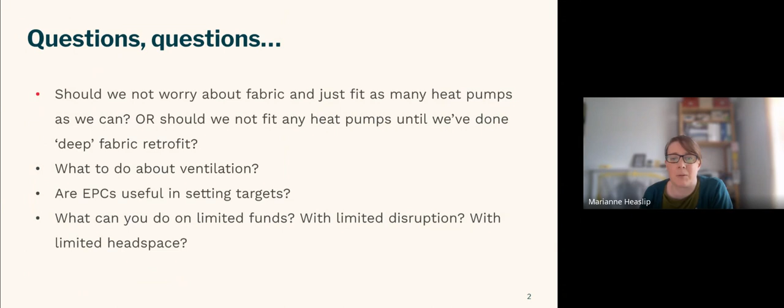I would always argue that the best thing to do is acknowledge that this is complicated, and understand that all of these questions can only really be answered with another set of questions - about understanding your aims and your priorities. Ultimately, it all comes down to what is it that you're actually trying to achieve. By understanding that as well as you can, you're able to answer some of those other questions, and understand where your efforts should go, what you should be prioritizing, what you should emphasize.

A really key thing is to understand what your retrofit priorities are. Is it purely about carbon emissions reductions? Is that all you're concerned about? Is it about fuel poverty and fuel bill reductions - a different angle on things you are most focused on? Or is it about the comfort and health of the occupants and also possibly of the buildings? There are lots of other things listed there, lots of things to take into account.

What you need to understand is that things like decarbonisation have technologies, approaches and methodologies that go best with them, versus things like comfort, health and fuel poverty, which may have some overlapping approaches that work well and things that align, but they're not actually the same thing.

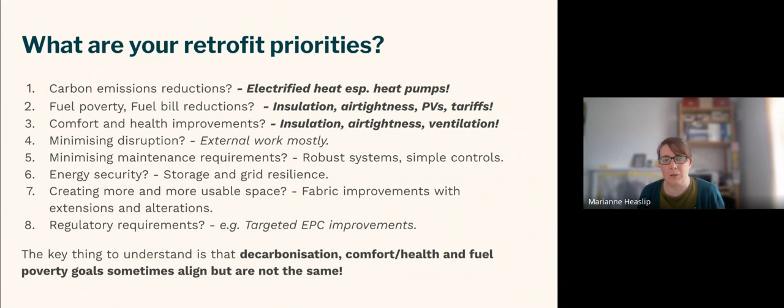...requires a different approach, and understanding what your focus is and which of those you're most driven to achieve - sometimes that's about the needs of the people in the house. No doubt, that's what it should always be about, really. But no doubt it will also be about how much money you have, what the requirements of funders are - all of these other things go into it. Being clear about your aims at the outset will really help you make decisions further down the project.

Ultimately, it's the retrofit project brief that's the really key document. It's going to help you understand what you're focusing on, what you can safely exclude, what things might be distractions. That brief is all about establishing intended outcomes as set out in PAS 2035, the standard that a lot of us are working to. It's not about whether or not you've fitted a specific technology - it's not about bells and whistles. It's about what are the outcomes you're trying to achieve, and understanding that is really key to any successful retrofit project.

Once you've understood that, there are some key principles useful to keep in mind when thinking about retrofit. This applies to any building, and I think it applies whether your focus is decarbonisation, fuel poverty, comfort, or something else.

The first of these, I would say, is always to practice responsible retrofit. Always try to understand the context - what's the existing construction you're dealing with, whether it's solid walls or cavity walls, what's the condition of that? Are there existing problems that need to be addressed, whether structural or damp, or things like failed cavity wall insulation or failing roof timbers? All of those things need to be understood before you start making plans as to how you're going to change that particular house or group of houses.

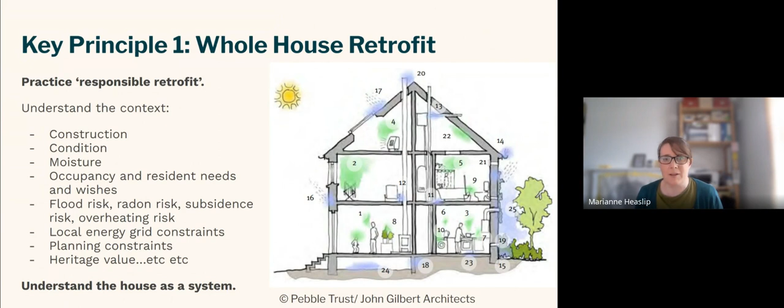I think a second really key principle is that repairs and maintenance really need to, if not come first, at least be considered first. So repairing leaking gutters, replacing window seals, repointing walls, all of that stuff needs to be done and either done up front or incorporated in your retrofit plans.

Because otherwise, well, in the first instance, just doing those things will have an impact on the energy performance of a home, and comfort and health in the home, and health and well-being of occupants.

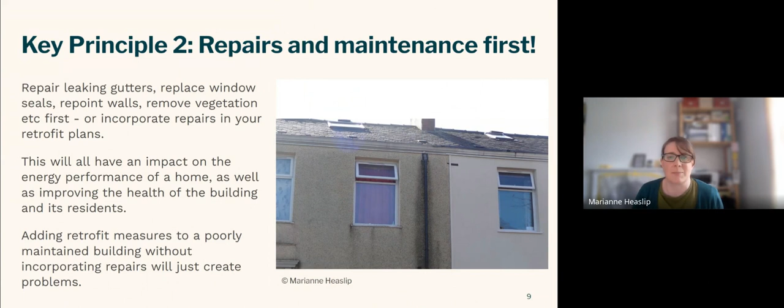The other thing we think about, I know a lot of people talk about fabric first, and I have done myself quite often, but I think it's something that can be potentially misconstrued, or it's ended up being a bit of a crazy debate between fabric first and heat pump only. Polarized debates don't necessarily help anyone.

What I would always suggest is that people balance fabric improvements and heat decarbonisation. So you're making the fabric improvements that make sense, that will make a difference to heating bills, to the health of the building, to the health and comfort of the people who live there, but also acknowledging that doing that well can be really tricky and quite disruptive.

And it's not always possible, either because your budget is too limited to do something really well, or because if you're going to tackle all those thermal bridges, there might be heritage constraints, restrictions, or planning restrictions, or you're too close to the highway, all of these things.

So rather than doing a kind of half a job, I guess, you try and do what it is possible to do really, really well, and then you balance that with heat decarbonisation, which usually means electrified heat and often means heat pumps.

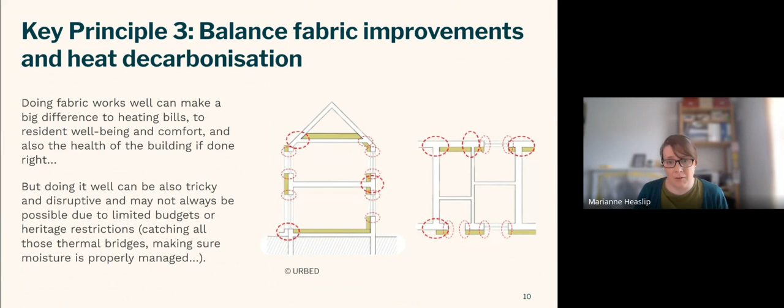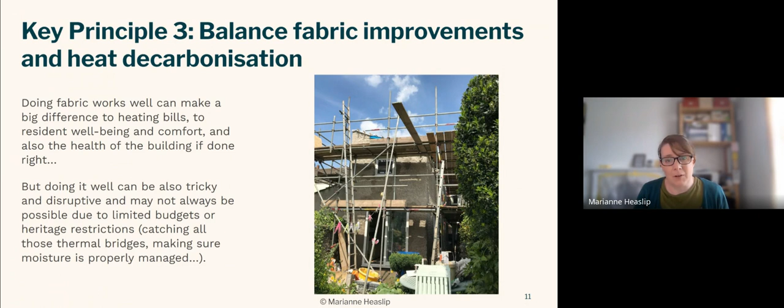Yeah, just another illustration there of how disruptive and messy some fabric works can be. That's getting external wall insulation done and re-roofing. But even with all of that work, it can make a big difference to the comfort and the well-being of occupants, the health of the building, protect the building from the weather, all of that work.

But it generally makes a lesser contribution to decarbonisation and overall reductions in energy use. It can be helpful to the grid in that it reduces peak demand, but the big decrease in carbon emissions and total energy demand across our housing stock is going to come from replacing fossil gas and other fossil fuelled heating systems that burn things, with electrified heat and heat pumps.

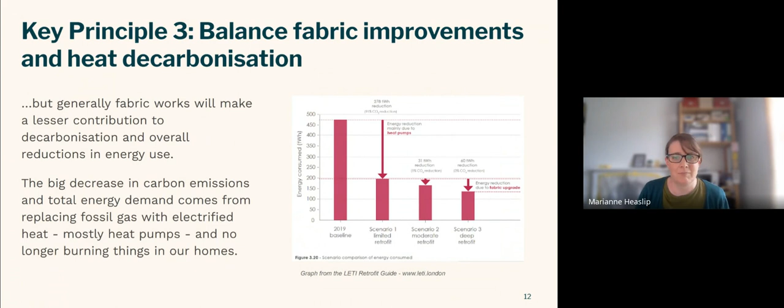I think what you're ultimately saying is that at a national level, policy and funding should really be driving both decarbonisation—getting rid of fossil gas boilers and oil boilers—and addressing fuel poverty, making sure people can actually afford to heat their homes to a healthy level.

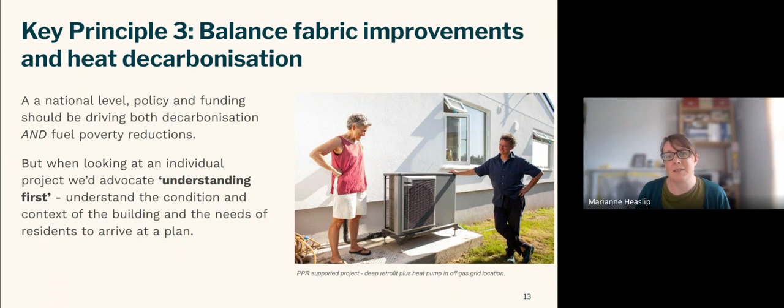But when you're looking at an individual house or project, we'd always advocate understanding first—understanding the condition and context of the building and the needs of the residents, to arrive at a plan that works for them and for that building within all those other constraints. It's very context dependent, about what those residents, that landlord, or that property is most suited to.

This is an image of a project I was involved in in Leeds, where we did a full deep retrofit of some very drafty, poorly performing Wimpey no-fines houses. There, the full deep retrofit made a lot of sense because it was tackling fuel poverty, but it was also part of a decarbonisation programme.

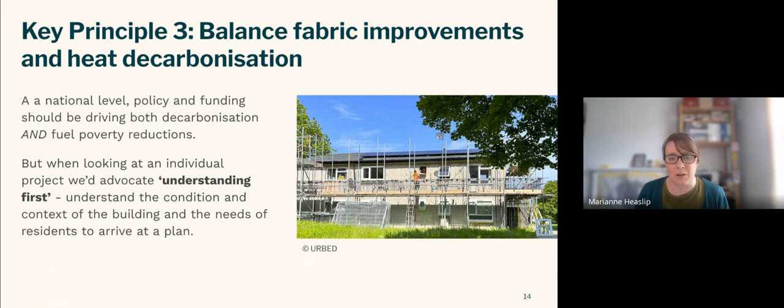So they also included heat pumps where they could. The solar panels on the roof do something for decarbonising the grid, but also massively help reduce people's fuel bills if they're home during the day—their heat pump can run off the solar PV in spring and autumn, and do hot water in summer. So it's really about understanding your particular context.

I thought it would be useful to play this video. It's about Part L, going a little deeper into issues around fabric efficiency. It's one we made alongside Zero Carbon Harrogate to help people understand how the building regulations relate to retrofit. So here goes.

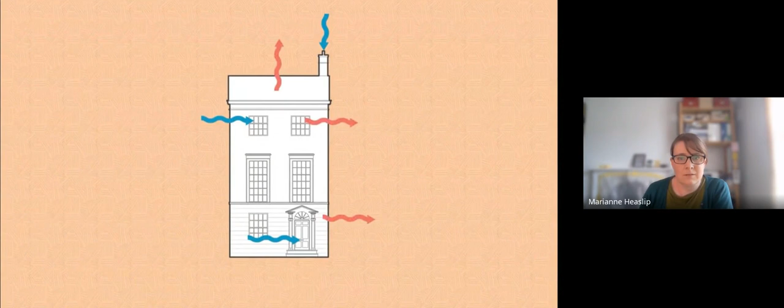Many homes have poor thermal performance. Drafty, poorly insulated homes leave those living in them cold, uncomfortable, and struggling with high energy bills and dangerous mould. Generating all this wasted energy has a big impact on our environment too.

Whatever building work you do, from refurbishment to extensions to deep retrofit projects, your work can make an impact on the energy efficiency of people's homes.

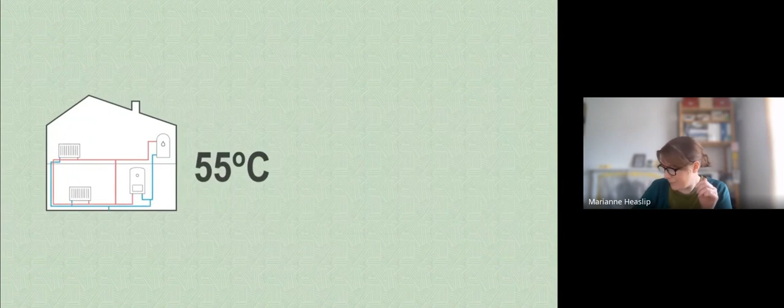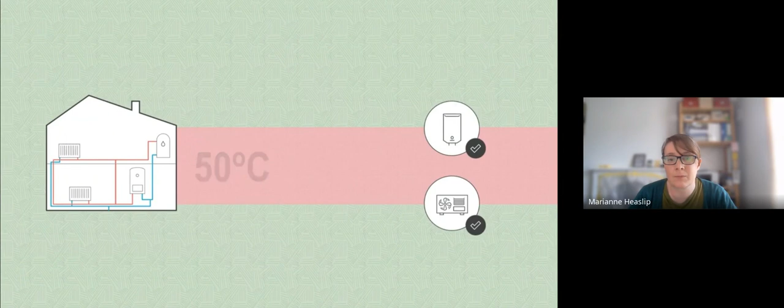Part L of the building regulations provides guidance on energy efficiency. It covers the thermal performance of a building's fabric and heating systems. Part L requires heating systems to be designed to a maximum flow temperature of 55 degrees Celsius. This is to ensure condensing gas boilers run efficiently and to help get homes ready for low carbon heating systems like heat pumps. The lower the flow temperature, the better, as heat pumps operate most efficiently at flow temperatures below 40 degrees Celsius.

To meet the low flow temperature requirements, you will need to do heat loss calculations to choose appropriately sized radiators and pipework. You'll also need to consider how the heating system interacts with existing and planned fabric improvements.

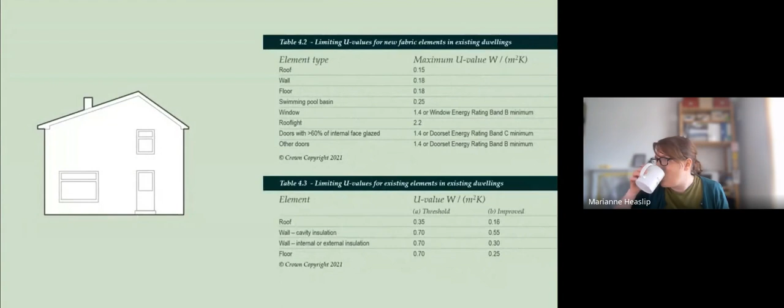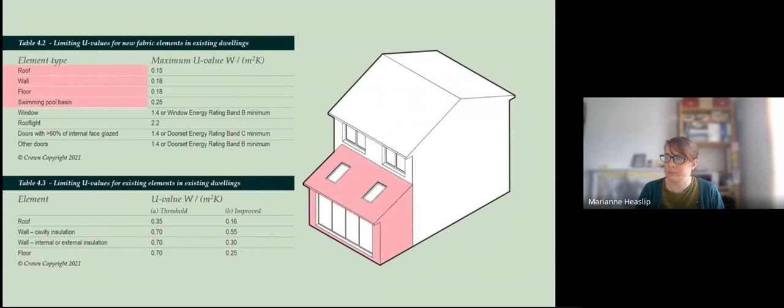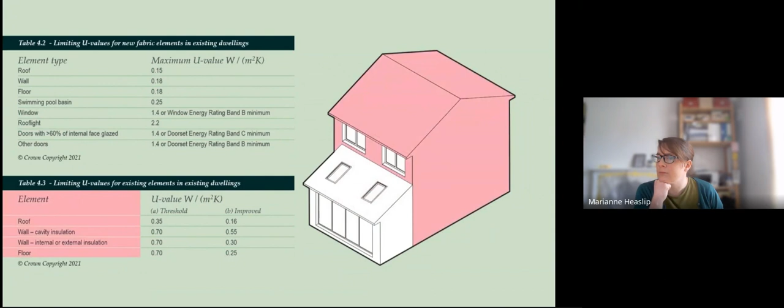Part L provides target U-values for the building fabric. These apply to both new and renovated elements of dwellings. New elements include the roof, external walls, and floor of an extension. Replacement windows and doors in an existing structure are also new elements. New elements have lower, more demanding U-value targets than renovated elements. Renovated elements include the roof, external walls, and floor of an existing structure.

If you are adding or replacing a layer on more than 50% of an external wall, roof, or floor, then the Part L targets apply. That means re-roofing, replastering, re-rendering, or reflooring are all regulated under Part L. These common building jobs are good opportunities to install appropriate insulation, and you may need to do so to meet the building regulations targets.

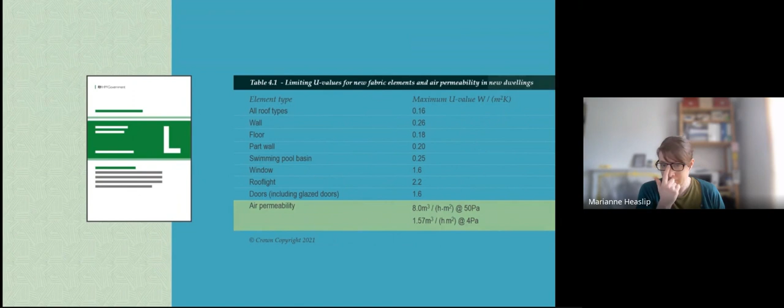Part L also has targets for improving the airtightness of buildings. These targets only apply to new builds, but for existing buildings there is guidance on measures you can take. Part L suggests sealing around service penetrations when installing pipework, and draft-proofing when installing windows. This can make a big difference to the thermal performance of a home.

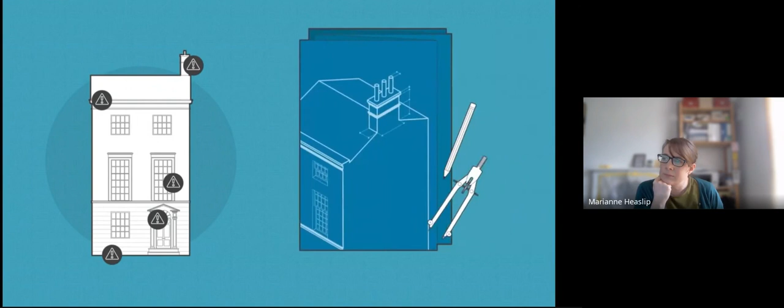When you're doing airtightness work or installing insulation, it's important to take a risk-based approach. Considering risk and planning mitigations means you can avoid introducing unexpected problems or causing damage. Moisture is a big risk in retrofit—it's covered in Part C.

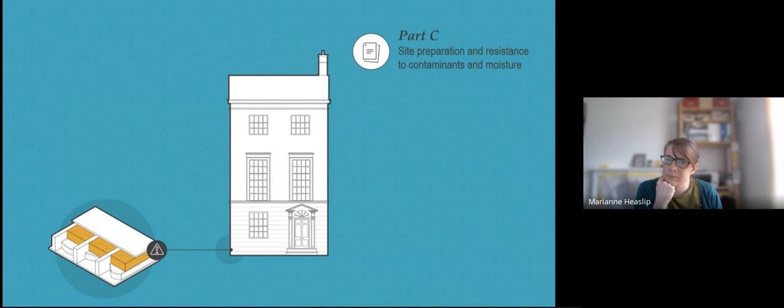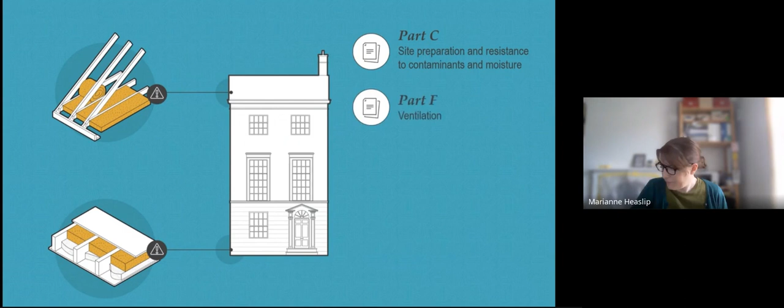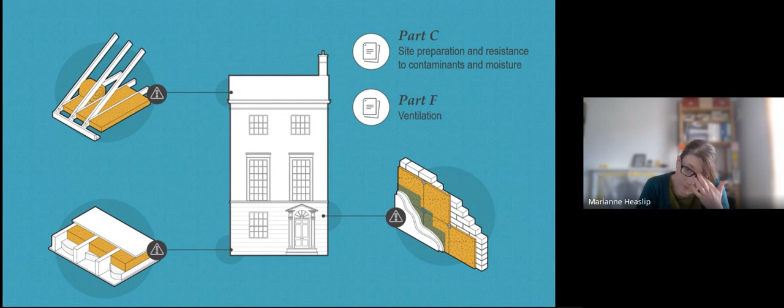When you're insulating a suspended ground floor, high moisture levels in the subfloor can damage joists. The same goes for high moisture levels in the roof when installing a cold loft space. Ventilation is key to managing this moisture, and Part F has more on that. If you're insulating an external wall, you'll need to consider moisture too—choose appropriate insulation approaches to avoid interstitial or surface condensation, as well as penetrating damp.

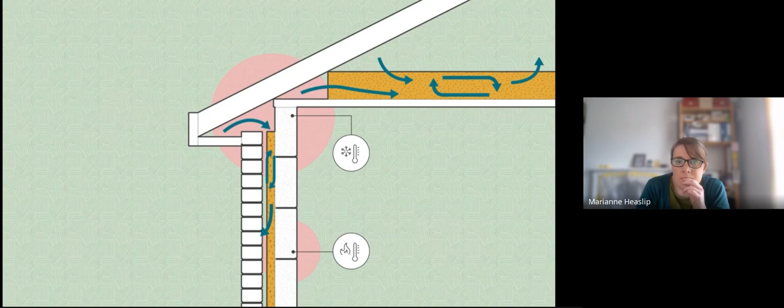The way that you install insulation also matters. Gaps between insulation materials and other elements can create thermal bridges. These gaps can also cause thermal bypass, where outside air gets between insulation layers or goes around the insulation altogether. These quality issues greatly reduce the efficiency of insulation and can cause damaging condensation and mould, so take care to ensure insulation is properly installed and gaps are mitigated.

There are other parts of building regulations that interact with Part L too. Part J covers air supply requirements for fuel-burning appliances. Part B covers fire safety, and Part O addresses overheating. Understanding the interactions between these different regulations helps you manage risk when improving a building's energy efficiency.

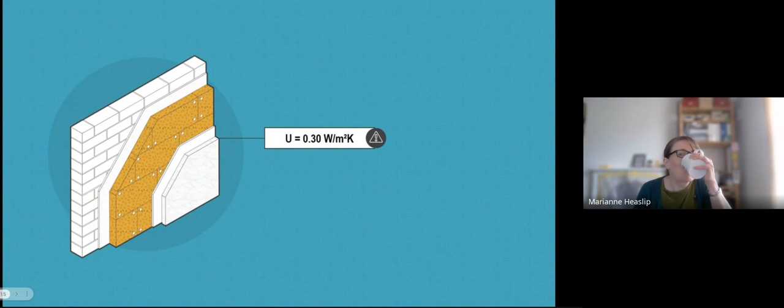After assessing the risks, you may decide that meeting the Part L targets would cause problems. If meeting a target U value isn't technically or functionally feasible, you can have a higher U value, up to 0.7 watts per square metre Kelvin. Further exceptions apply, if necessary, to protect from the harmful effects of interstitial condensation, avoid excessive cost, or address heritage factors.

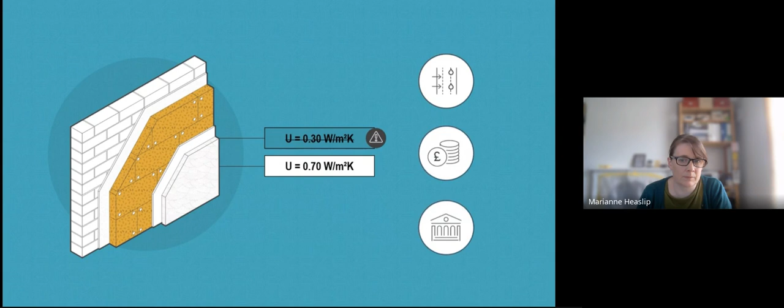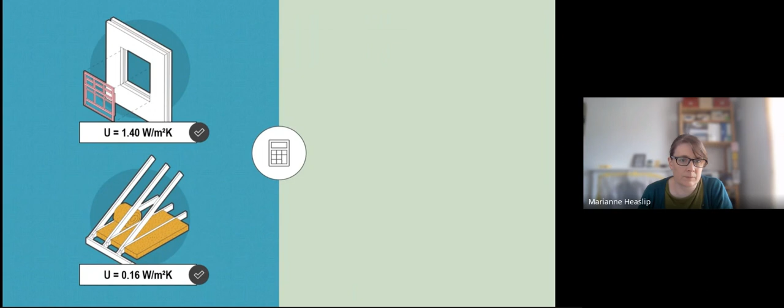Calculating the U value of each thermal element is one way of complying with Part L targets. If you're working on simple energy efficiency measures, like topping up loft insulation, this elemental approach is a good fit. But another approach is to model the performance of the whole building using SAP. By considering the whole building, you get greater design freedom and can trade off U values. That's useful when some elements underperform due to risk and context considerations.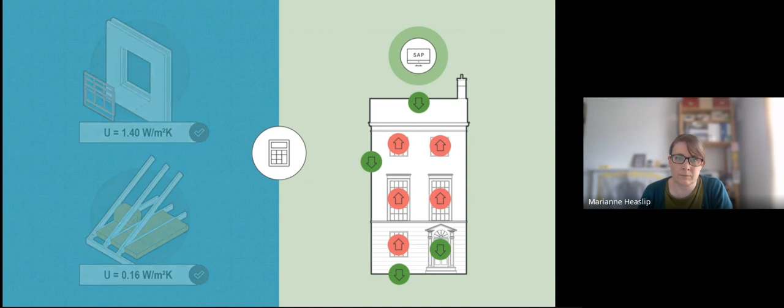If you are working on a deep retrofit with multiple measures to consider, a modelled approach may work best. By considering interacting risks and implementing Part L's requirements, you can make a positive impact on people's homes and on our environment.

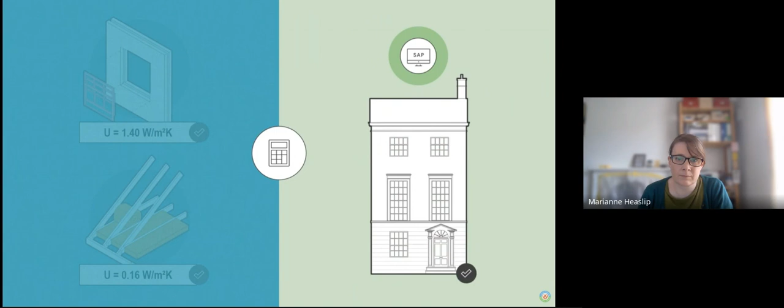Hopefully that was useful.

I think the other thing that we need to consider alongside insulation, which obviously Part L focuses on, is that it does mention air tightness or draft proofing. We'd always say that a really key principle in addressing any energy efficiency retrofit project is that you should build tight. So that means make sure you've done as much as you can around draft proofing and air tightness, because insulation, ventilation and air tightness all go hand in hand.

Going back to thinking about the building as a system, each of these helps the other perform better. So if you were to install insulation or new windows and not consider air tightness at all, that would really quite badly negate a lot of the potential benefits of those works, because you end up with thermal bypass, or leaks around windows that reduce their positive impact.

Good air tightness can significantly improve comfort by eliminating drafts as well, because we tend to feel more uncomfortable because of drafts than we do because of just the general air temperature. It's the draft that helps cool you down, which can be a good thing in summer, but in the middle of winter isn't necessarily something that you want.

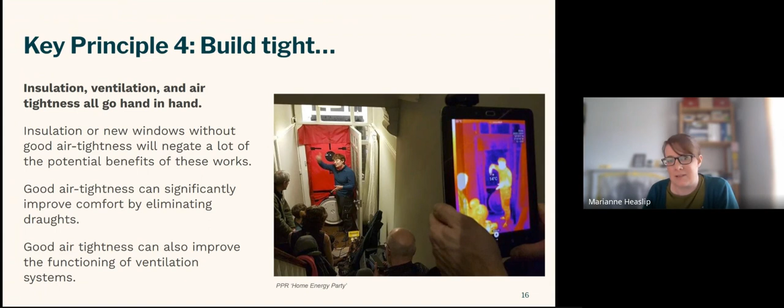So alongside air tightness, build tight, ventilate right. Any retrofit project that doesn't consider ventilation creates risks to the health of the building and its occupants.

Although there is a lot of guidance around at what point planned ventilation might need to be introduced, I know from my experience and from various bits of post-occupancy evaluation research I've either read or been involved with, how leaky the building is doesn't actually bear a very direct relationship to the quality of the air within that building. So you can't rely on the fact that the building's leaky to say it doesn't matter, we don't need a ventilation system or strategy of any kind because the building's just really leaky. Actually, just having a leaky building is no guarantee of good ventilation and no guarantee of good indoor air quality.

So any retrofit plan really should include a ventilation assessment. That's something that's set out in the PAS 2035 standard, and also a very robust ventilation strategy that includes considerations of moisture risks and maintenance and controls, and considers supply and extract and how that's all going to work together. It's really not just about sticking some fans in.

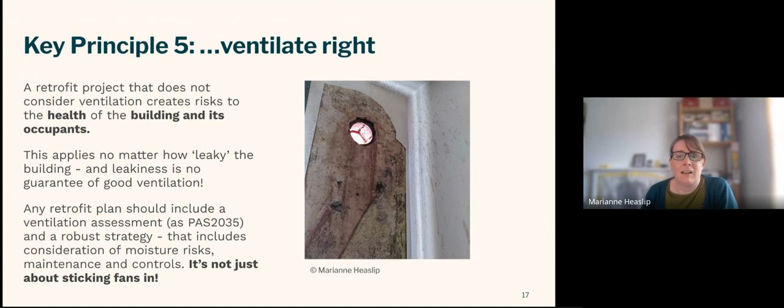I've got another short video that I will play you that's about Part F that explains some of this in a bit more detail with some animations that hopefully will help.

Installing energy efficiency measures in a building stops heat from escaping and prevents cold air getting in, but it might also cause a building to become underventilated as air tightness increases. If this happens, the insulation and air tightness work can cause unintended problems with moisture and internal air quality.

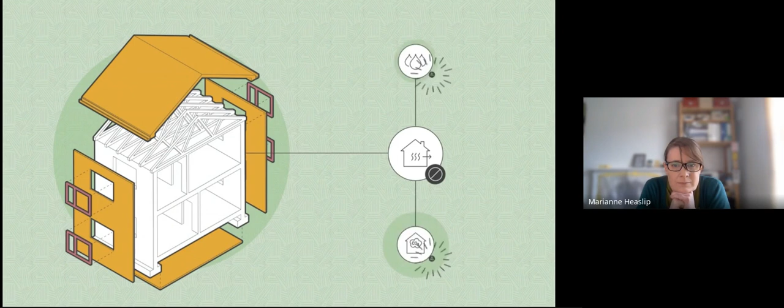Part F of the building regulations covers ventilation. It applies to both new and existing buildings and helps you ensure that there's enough fresh air to keep buildings safe and residents healthy.

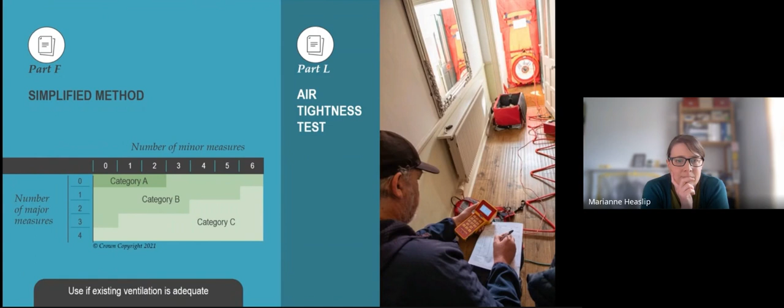Part F can help you determine which ventilation strategy you need. You can confirm this by carrying out an air tightness test, outlined in Part L. But Part F also gives you another simplified method. This method can be used if ventilation is adequate. But if there are existing problems with condensation or mould, that is a sign ventilation is inadequate and must be upgraded.

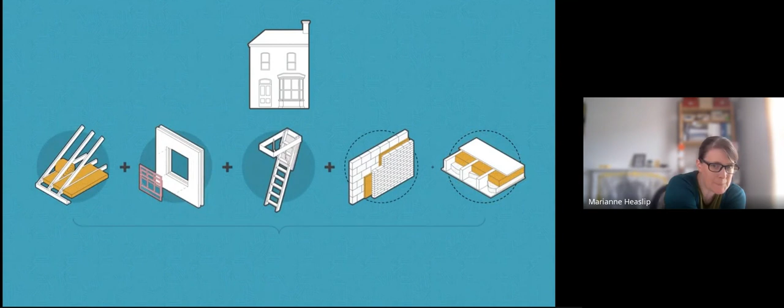If a building has adequate ventilation, Part F guides you to tally up all the energy efficiency works already done to a building, plus all the works you are planning to install. By adding these up, you can determine if the planned improvements will leave the building in need of further ventilation. Take care—if you're not certain, it's always best to upgrade ventilation.

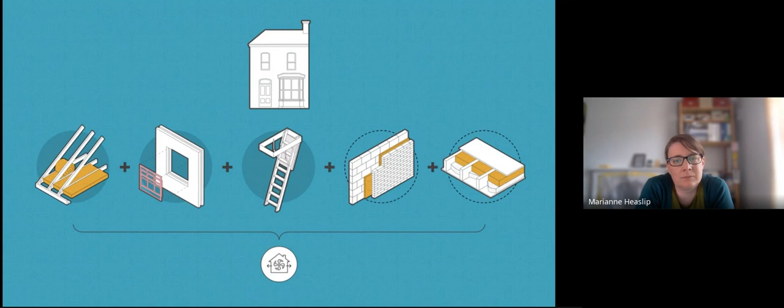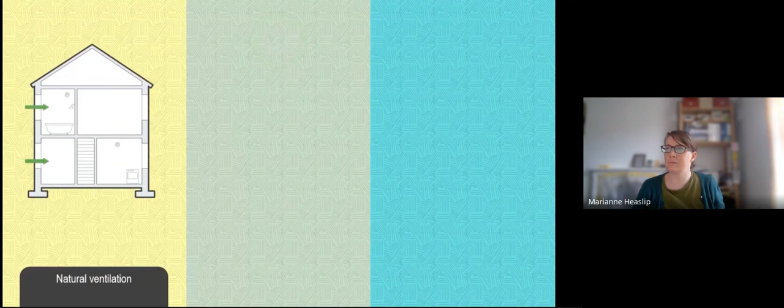Part F gives you three ventilation strategies to choose from. Natural ventilation strategies are simple to install, using background ventilators and intermittent extract ventilation in different places around the building.

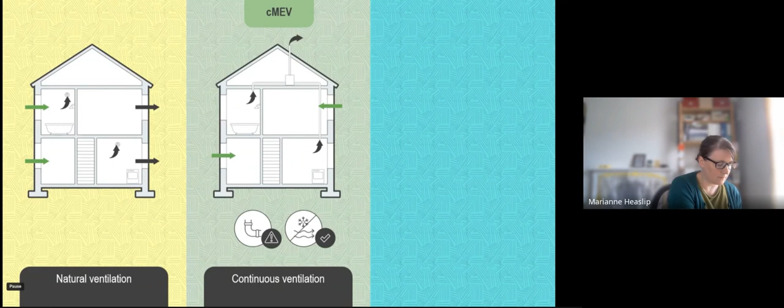Then there are continuous ventilation systems, which can be decentralised or centralised. These systems aren't much more complicated to install than intermittent extract, though they do require ductwork. They can use passive intake methods, such as wall or window trickle vents, which means they can be easy to integrate into existing works and cause fewer drafts.

Mechanical ventilation with heat recovery covers systems that continuously supply outdoor air to the inside of the building, whilst extracting indoor air to the outside over a heat exchanger. These systems can be complex to retrofit as they require considerable ductwork, but they have great potential for improving air quality and reducing energy use by recovering heat from the extract air.

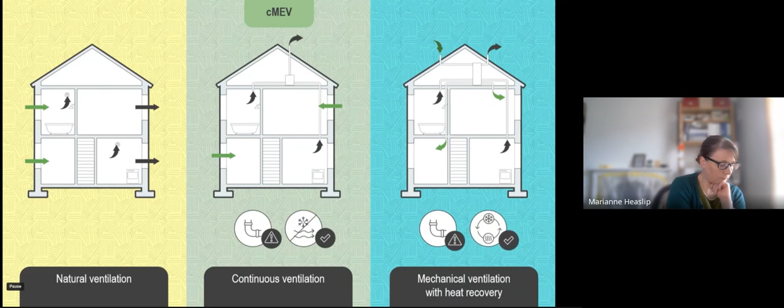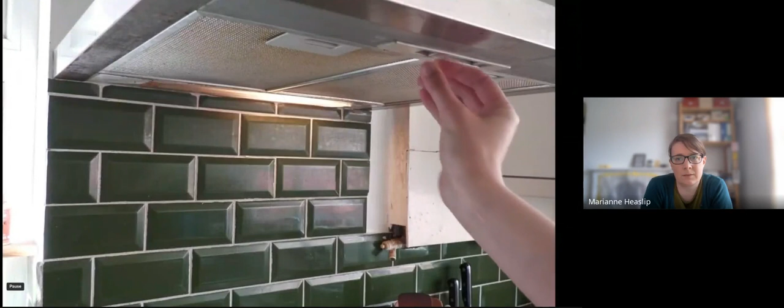As well as these ventilation systems, Part F also details requirements for other forms of ventilation that need to be considered in the design of systems and choice of equipment. Purge ventilation refers to manually controlled ventilation of rooms to rapidly dilute pollutants or disperse water vapour. Mechanical options, like boost functions on fans, are one option for purge ventilation. Openings like windows and doors are another.

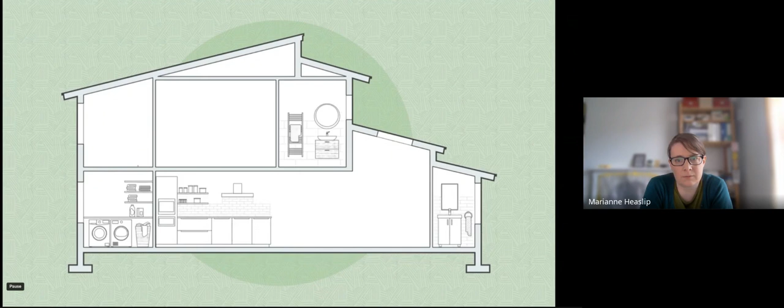In rooms where a lot of water vapour or pollutants are produced, dedicated ventilation is required. Kitchens, utility rooms, bathrooms and sanitary accommodation all require extract ventilation to maintain air quality. Part F allows for either intermittent or continuous extract ventilation and requires minimum extract rates to be met in these rooms.

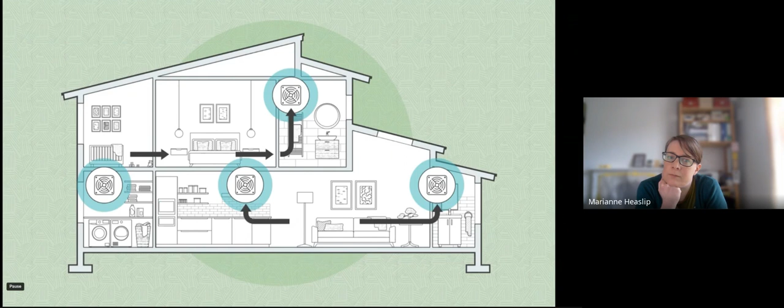Finally, whole-dwelling ventilation is needed to remove any pollutants and water vapour that aren't removed by extract ventilation, purge ventilation or infiltration. It's also needed to supply fresh outdoor air into the building. Part F has targets for the rate of air supply to habitable rooms and gives guidance on undercuts in doors to make sure that air flows in and around the building.

Once your installation work is done, Part F explains that you need to provide clear handover guidance to occupants on how to use their ventilation systems. This is really important to ensure that systems are used effectively and maintained to stay efficient.